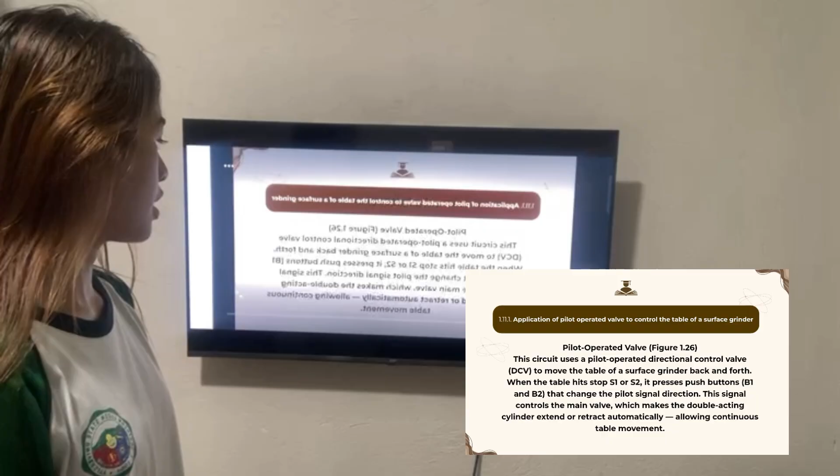Pilot-operated valve, figure 1.26. This circuit uses a pilot-operated directional control valve, or DCV, to move the table of a surface grinder back and forth. When the table hits stop S1 or S2, it presses push buttons B1 or B2 that change the pilot signal direction. This signal controls the main valve, which makes the double-acting cylinder extend or retract automatically, allowing continuous table movement.

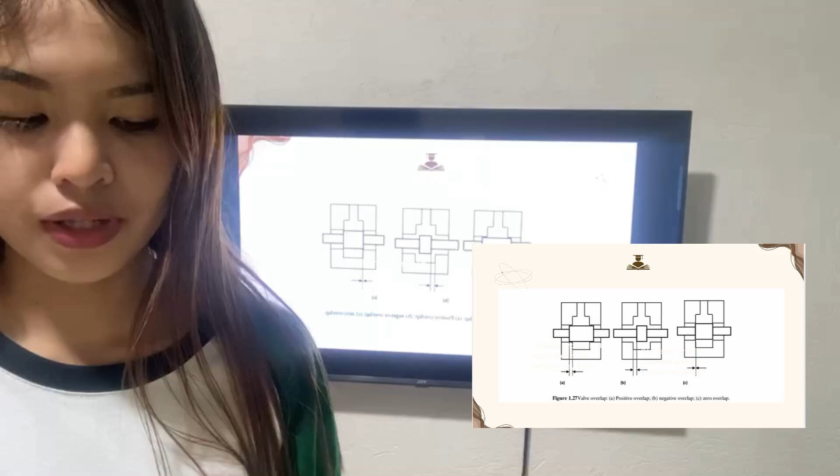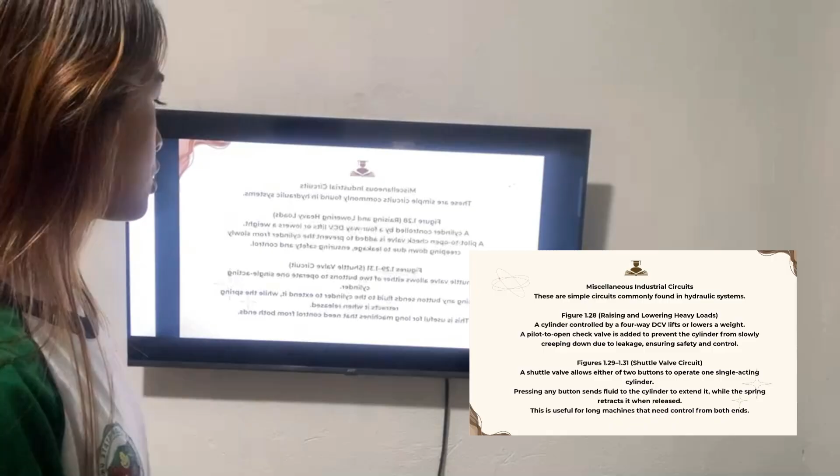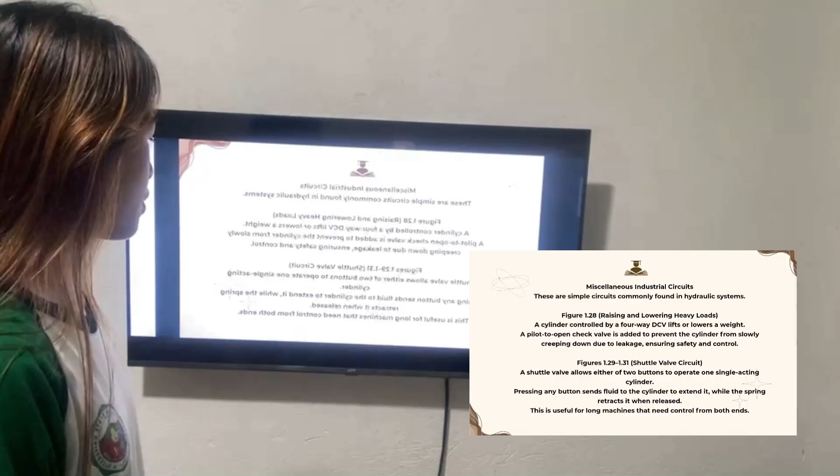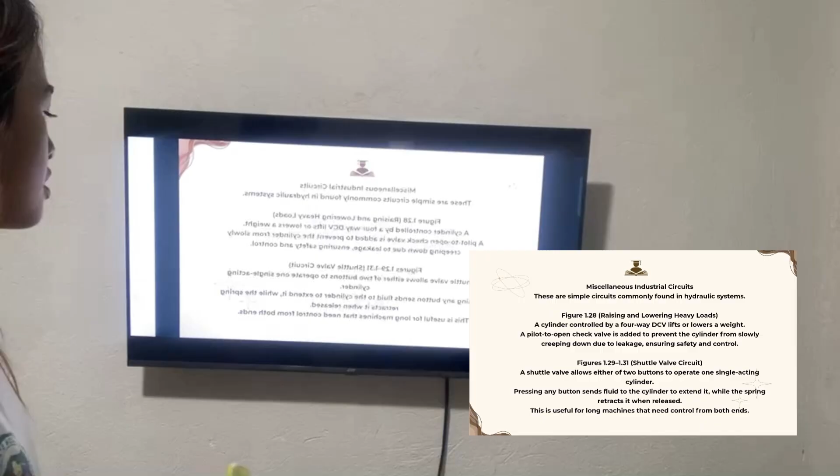There are simple circuits commonly found in hydraulic systems. Figure 1.28, raising and lowering heavy loads: a cylinder controlled by a four-way DCV lifts or lowers a weight. A pilot-to-open check valve is added to prevent the cylinder from slowly creeping down due to leakage, ensuring safety and control. Figures 1.29 to 1.31, shuttle valve circuit: a shuttle valve allows either of two buttons to operate one single-acting cylinder. Pressing any button sends fluid to the cylinder to extend it, while the spring retracts it when released. This is useful for long machines that need control from both ends.

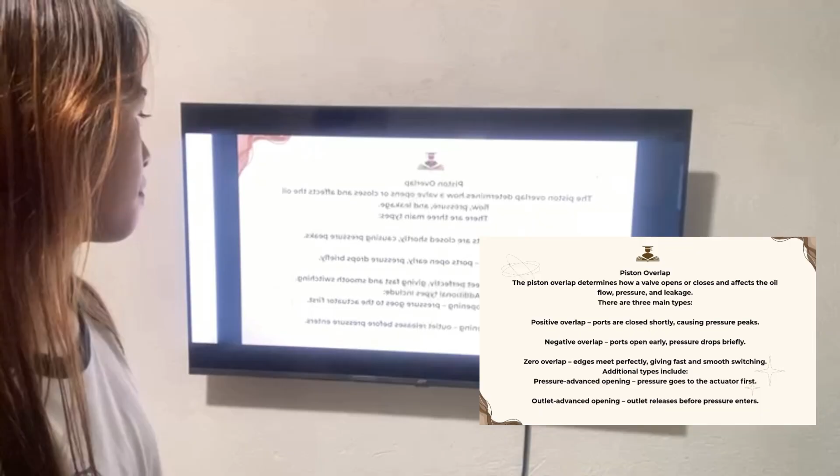Piston overlap. The piston overlap determines how a valve opens or closes and affects the oil flow, pressure, and leakage. There are three main types.

Tinutukoy nito ang pagkakaiba ng haba ng piston land, yung solid na parte ng spool, at ng port opening, yung daan ng langis nito. Ibig sabihin, ito ang distansya o pagitan ng mga parte ng valve kapag nagbubukas o nagsasara.

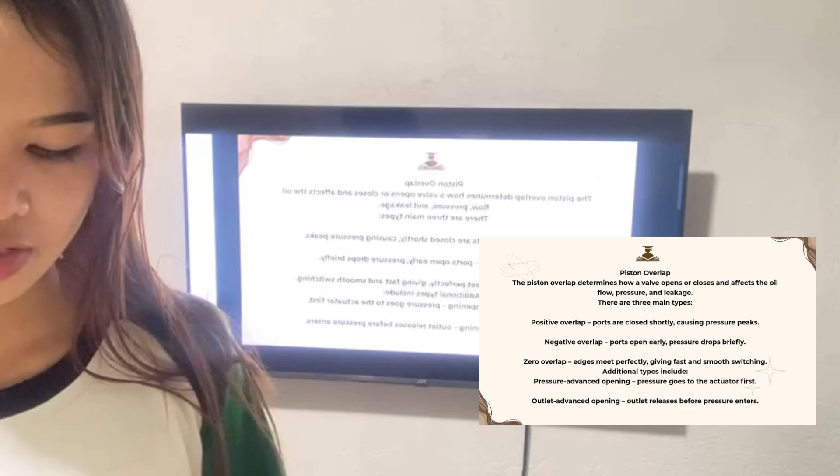Ang overlap na ito ay nakaka-epekto sa daloy ng langis at sa bilis ng paglipat ng switching.

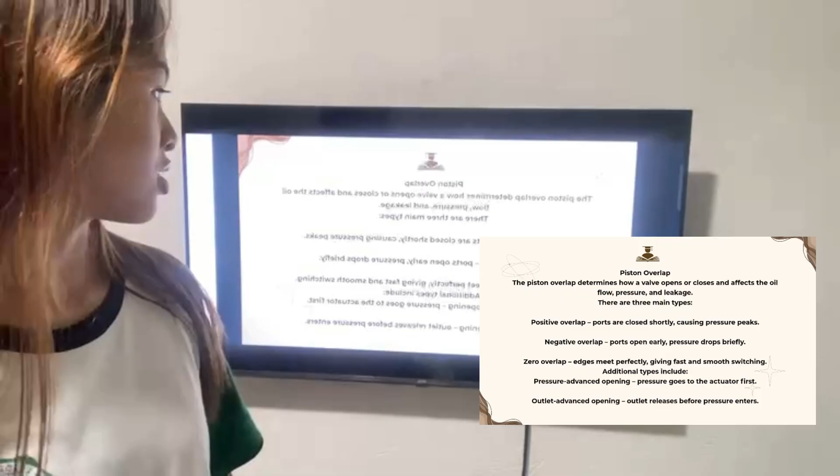At ito ang three types of piston overlap. Ang una ay positive overlap.

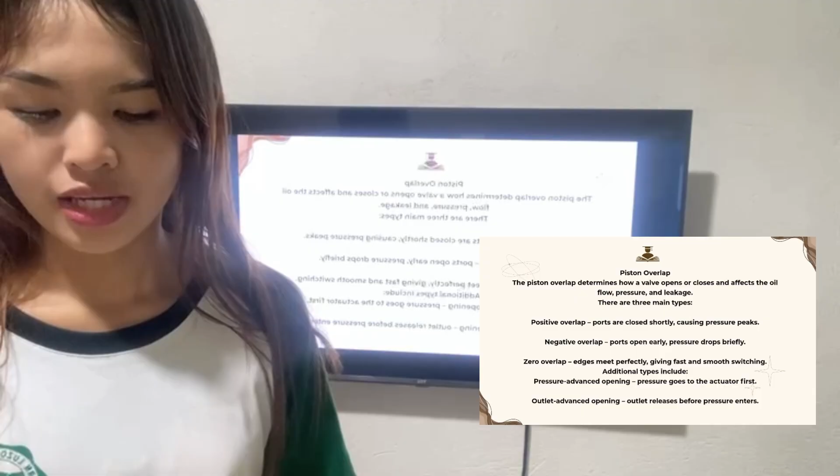Lahat ng daanan o ports ay sinasarado sandali habang lumilipat ang valve. Dahil dito, nagkakaroon ng biglaang pagtaas ng pressure.

Ang resulta nito, patigas o biglang galaw ang piston. Maganda para sa precise control pero hindi ito smooth gamitin.

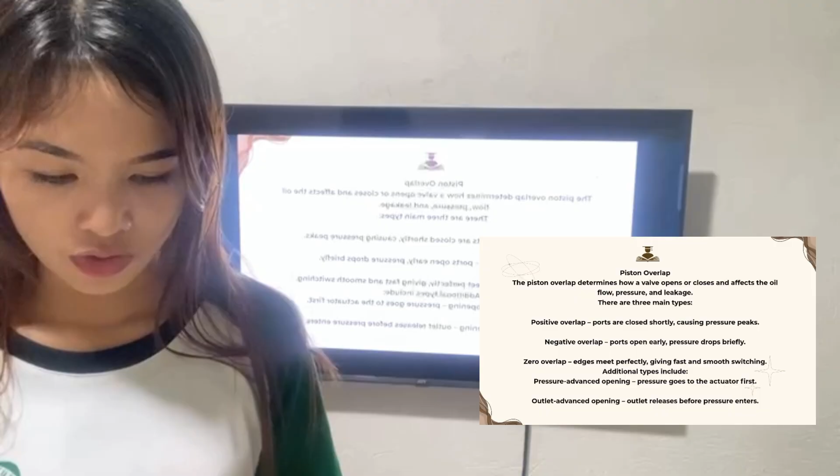Ang ikalawa naman ay negative overlap. Lahat ng daanan ay nagkakaugnay sandali habang lumilipat ito. Nagiging sanhi ng biglang pagbaba ng pressure, load drops down.

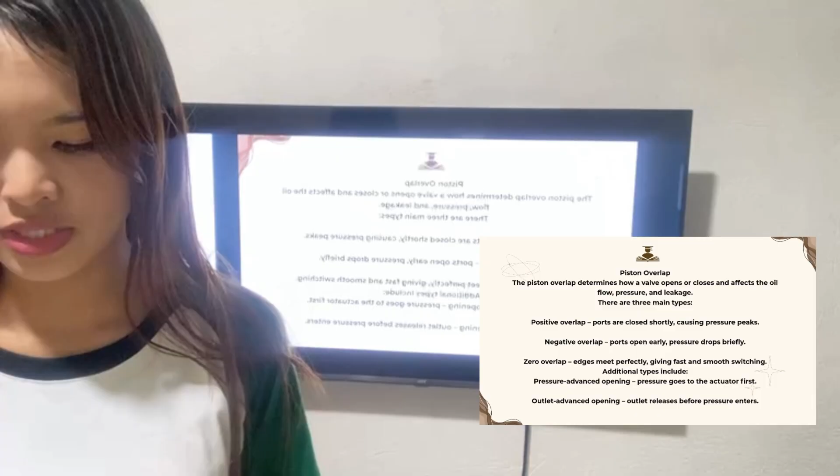Ang resulta naman nito ay mabilis, pero maaaring bumagsak ang load o mawalan ng control.

Ang pangatlo, zero overlap. Saktong nagtatagpo ang edges ng piston at port. Wala masyadong itong delay o leakage. Mabilis naman ito at pantay ang switching, kaya ito ang madalas gamitin sa high-speed system.

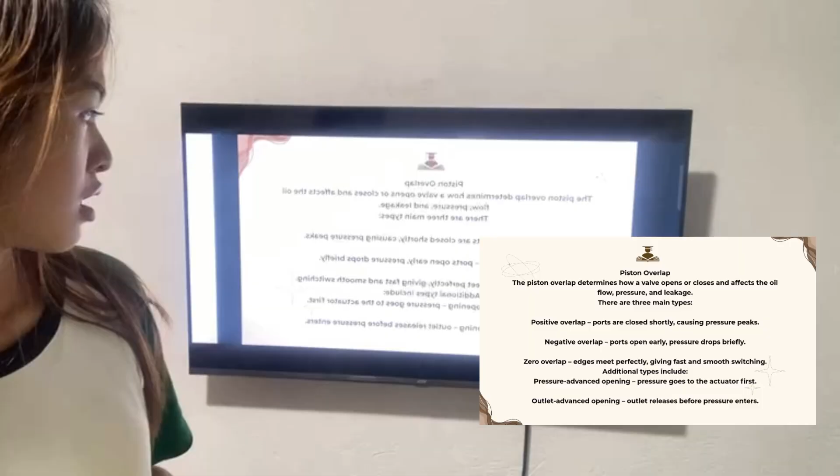At ang kasunod naman ay ang pressure-advanced opening.

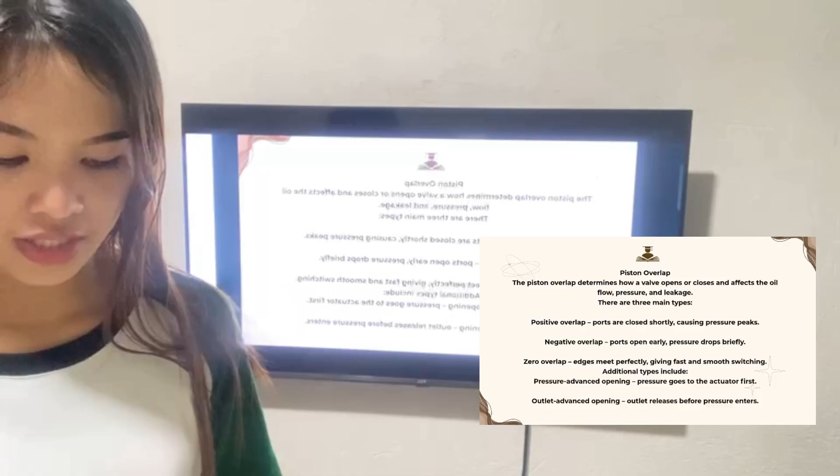Una munang nakakonekta ang pump sa actuator bago ito bumalik sa reservoir at nagbibigay ito agad ng pressure sa system kaya mabilis ito mag-response.

Ang kasunod ay ang outlet-advanced opening. Unang nagdi-disconnect o mabubuksan ang outlet papunta sa reservoir bago pumasok ang pressure mula sa pump.

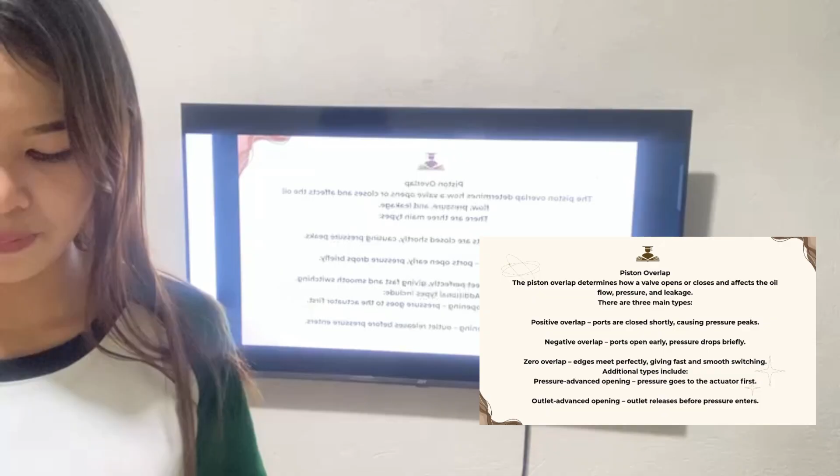Ang resulta ay maayos at kontroladong paglabas ng pressure, iwas sa biglaang paggalaw o pressure spike.

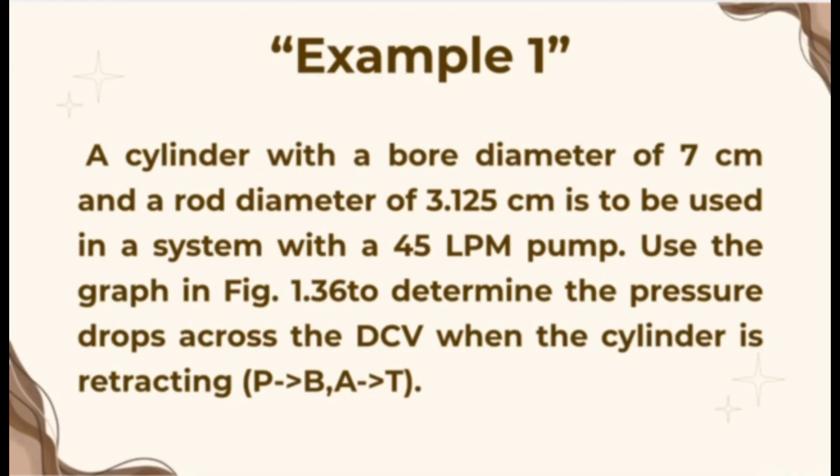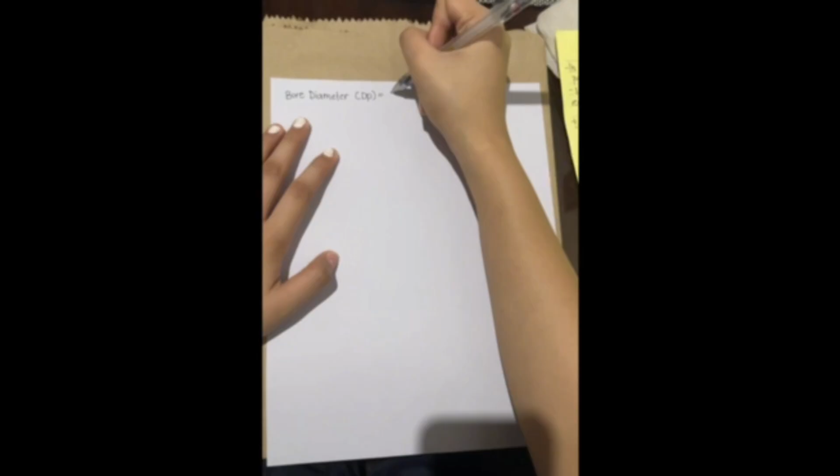First thing to do is let's find the given data. To find the given data, we're gonna find the bore diameter or the DP, the rod diameter or the DR, and the pump flow or the QP. According to example 1, the bore diameter or DP is equal to 7 cm, the rod diameter or DR is equal to 3.125 cm, and the pump flow or QP is equal to 45 LPM. And this is the clear given data.

To study the solution, first is alamin kung anong direction ng flow kapag nag-retract ang cylinder. Ang titingnan natin is yung P to B and A to T. Una, ang pump flow ay pupunta sa rod end, P to B. Ang fluid sa kabila ay lalabas bilang return flow, A to T.

After that, babasahin ang pressure drop para sa P to B. Kapag ang flow ay equals to 45 LPM, ang pressure drop mula sa P to B ay mga 3.2 bar. Then kailangang malaman ang return flow rate ng A to T. Ang area sa rodside ay mas maliit kaysa sa area sa boreside, kaya mas mabilis ang paglabas ng langis sa blind end, ibig sabihin mas malaki ang return flow.

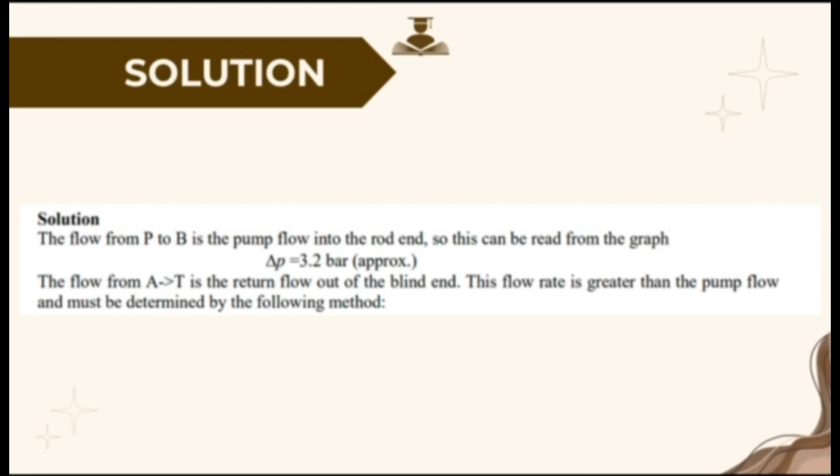So we must be determined by the following method. To solve, we're gonna calculate the piston area, rod area, and return flow. And here are the formula for piston area, and let me teach you how to solve it. AP is equal to pi over 4 times dP squared.

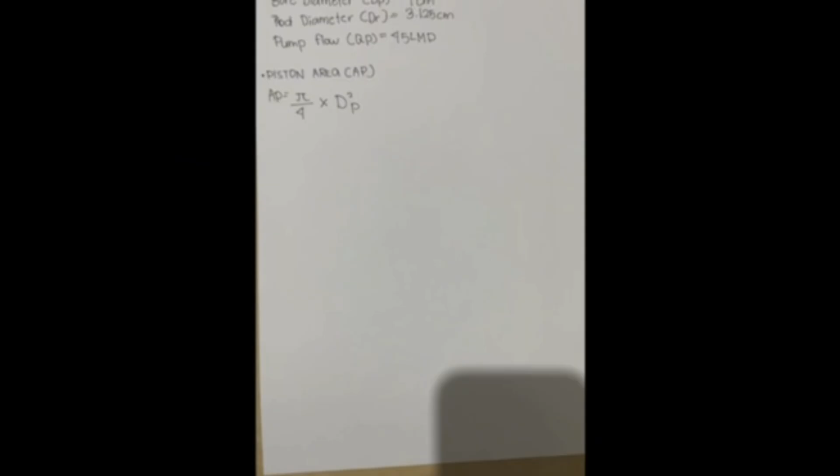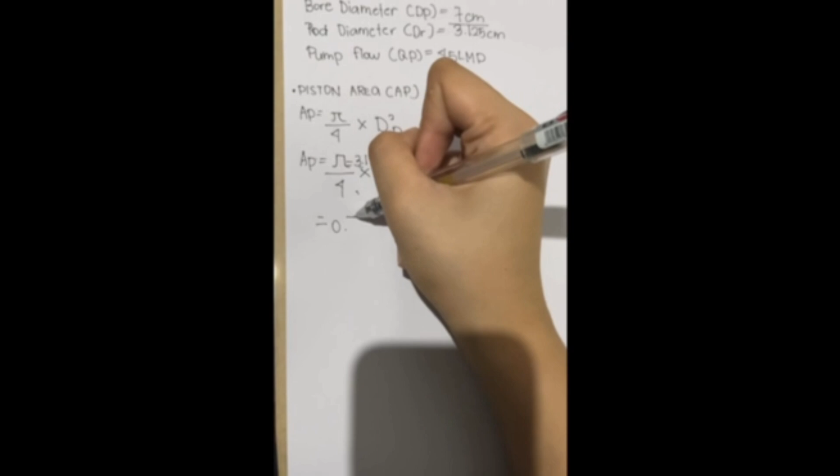To easily understand, we're gonna write again: AP is equal to pi over 4, times we're gonna substitute the dP, which is equal to 7 cm, and we're gonna write 7 cm squared. Next is we're gonna find the value of pi, which is 3.14, and we're gonna divide it by 4, and it's equal to 0.785 times 7 cm squared. Lastly, we're gonna multiply this, and the answer is 38.5 cm squared.

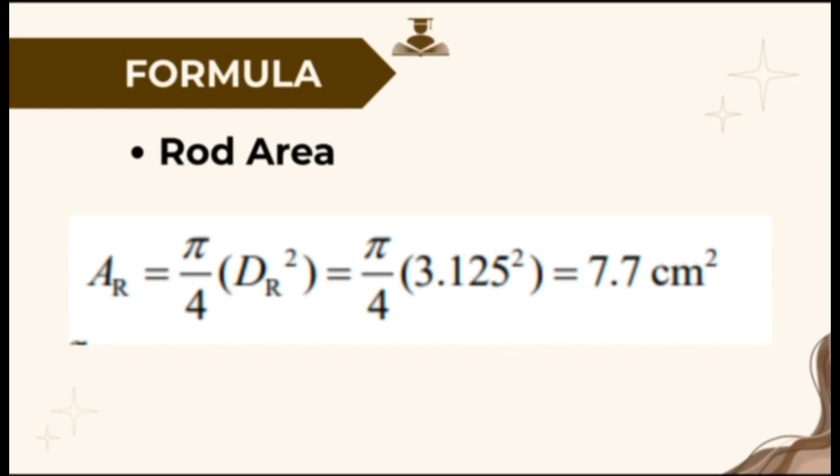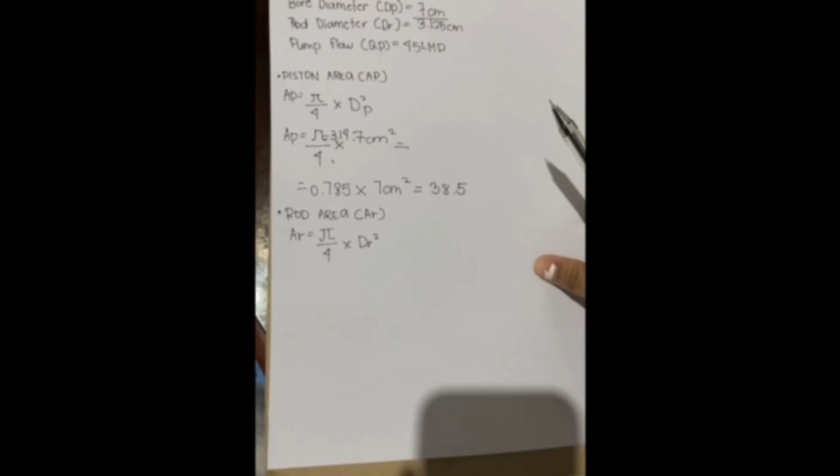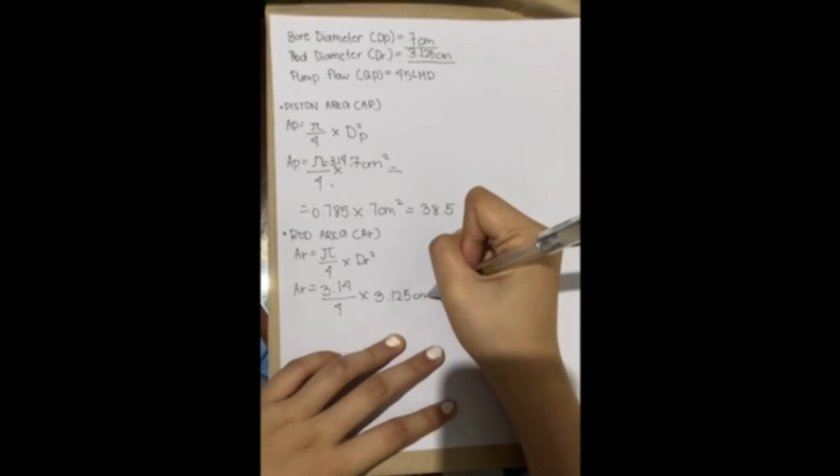And next is the rod area, let's compute this again. Rod area or AR, the formula is AR is equal to pi over 4 times dr squared. Next is we're gonna substitute: AR equals pi, which is 3.14, over 4, times the dr or the rod diameter, which is equal to 3.125 cm, squared. To compute again, 3.14 divided by 4 is equal to 0.785, then times 3.125 cm squared is equal to 7.7 cm squared.

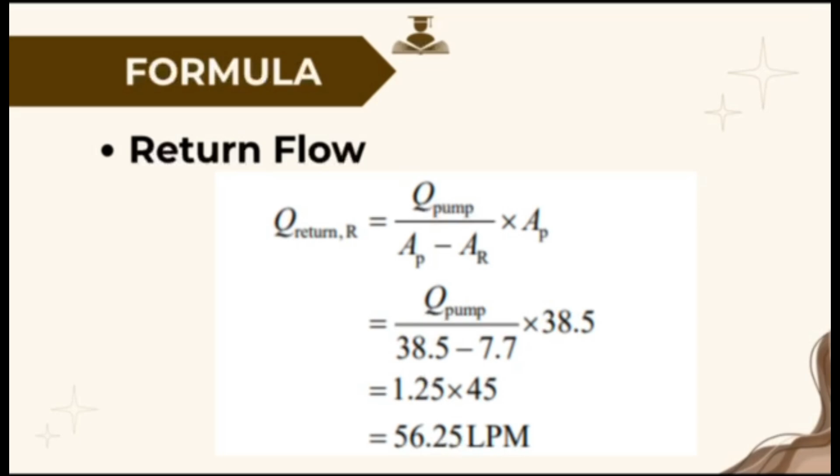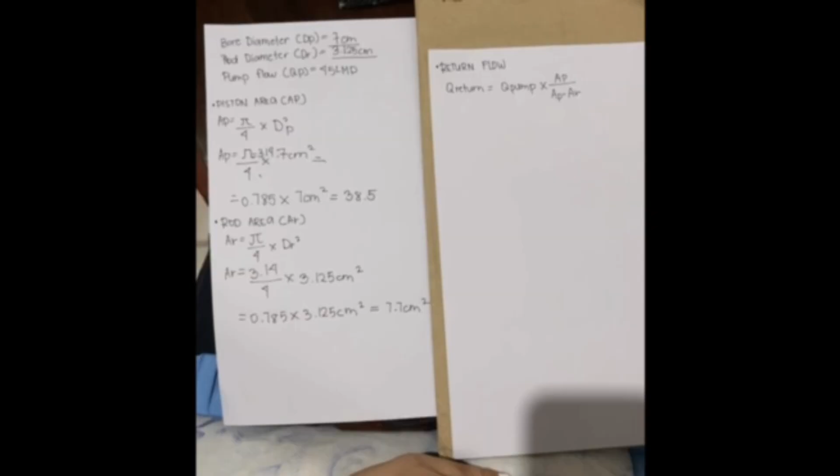And last is the return flow. Return flow formula: Q return is equal to Q pump times AP over AP minus AR. The first thing to do is to substitute again. So Q return is equal to pump flow or QP, which is equivalent to 45 LPM.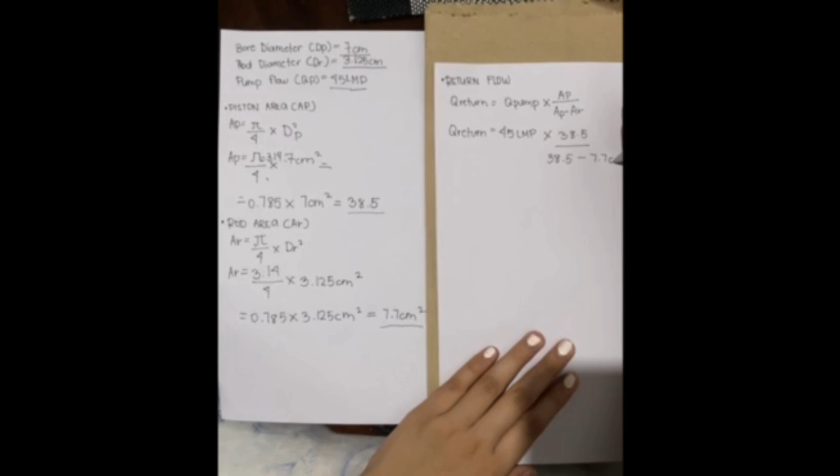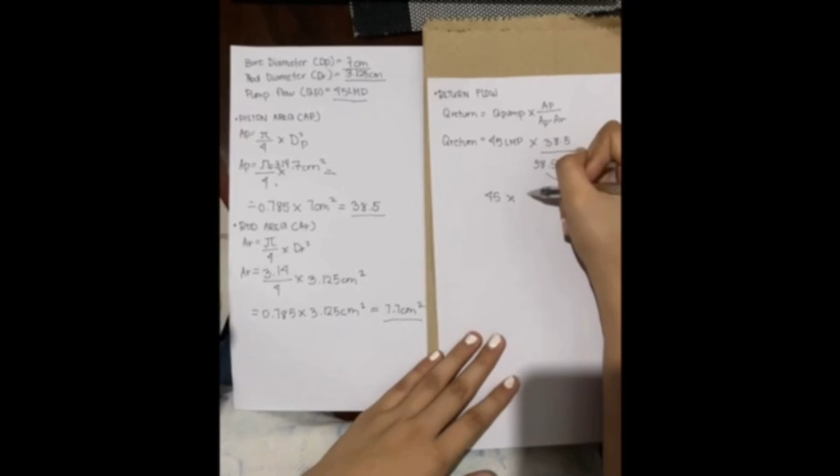Times AP, or the piston area, which is 38.5 over AP again, 38.5 minus AR or the rod area, which is equal to 7.7. First thing to do is to subtract 38.5 minus 7.7. To easily understand, we're gonna copy again the 45 times 38.5, and the answer for the subtraction is 30.8.

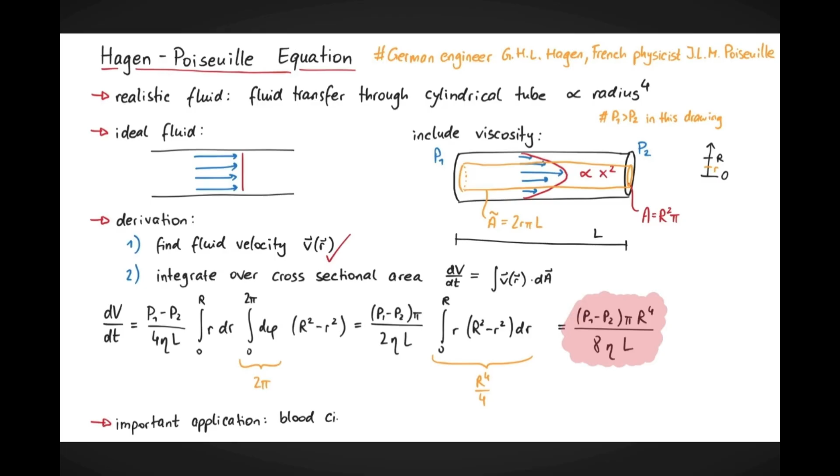This has important consequences, for instance, for blood circulation in the human body. By doubling or halving the radius of an artery, the human body can control how much blood flows through it by a factor of 16.

As a final note, if we consider just an infinitesimal portion of the tube, we can replace the pressure difference divided by the tube length by a pressure gradient.

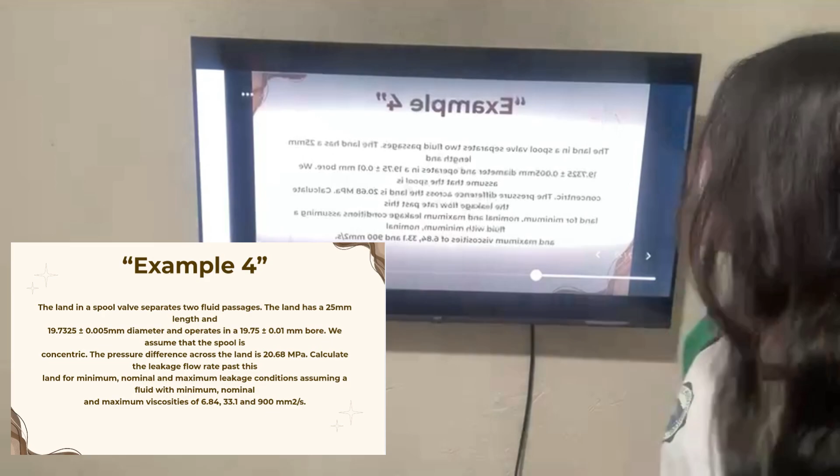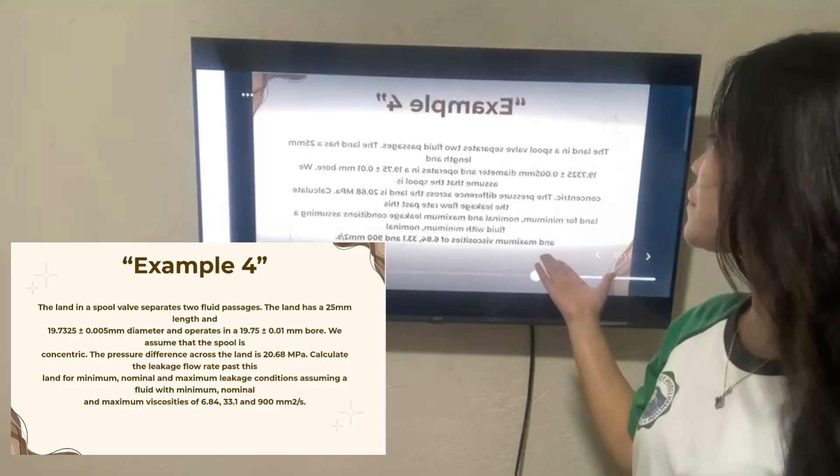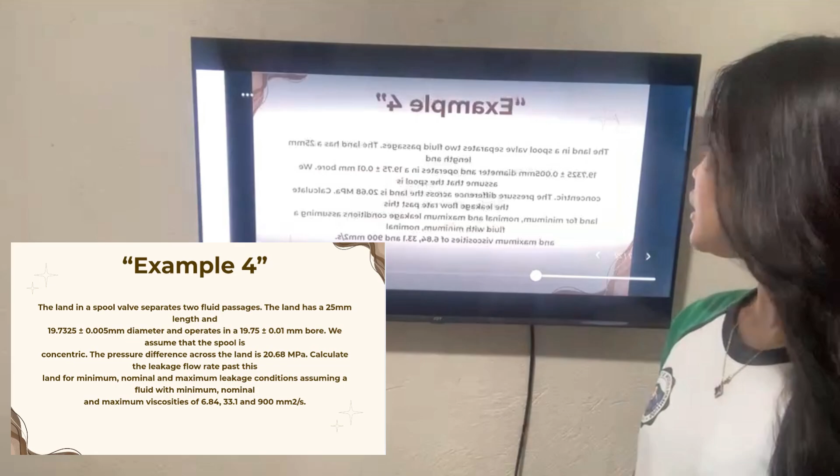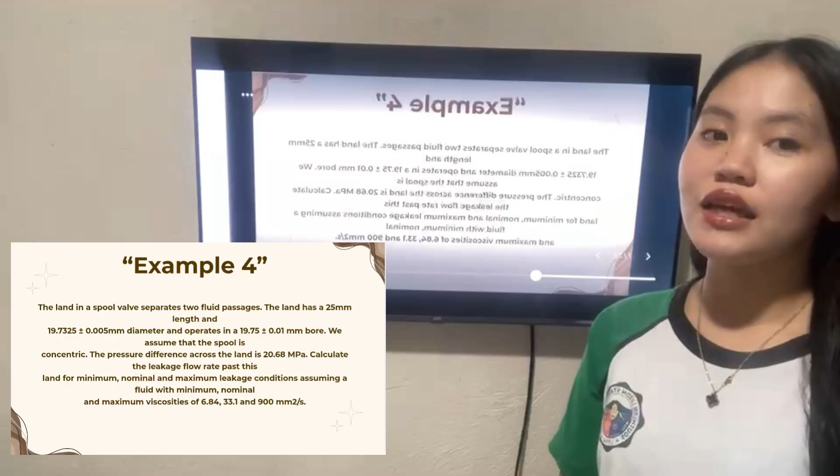Let's begin with example number 4. The land in a spool valve separates two fluid passages. The land has a 25 mm length and 19.7325 plus minus 0.005 mm diameter, and operates in a 19.75 plus minus 0.01 mm bore. We assume that the spool is concentric. The pressure difference across the land is 20.68 MPa. Calculate the leakage flow rate past this land for minimum, nominal, and maximum leakage conditions, assuming a fluid with minimum, nominal, and maximum viscosities of 6.84, 33.1, and 900 mm squared per second.

Let's start with the given. The land length is 25 mm, and spool diameter, symbol ds, equals 19.7325 plus minus 0.005 mm. Bore diameter, symbol db, equals 19.75 plus minus 0.01 mm. Pressure difference, P, equals 20.68 MPa. Kinematic viscosity minimum is 6.84, viscosity nominal equals 33.1, and viscosity maximum equals 900. So the given will be required for minimum clearance, nominal clearance, and maximum clearance.

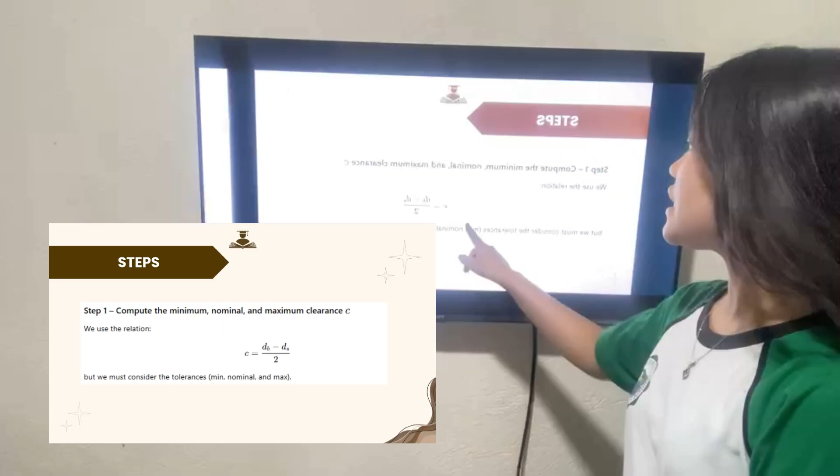For the steps, we will start with step 1, which is to compute the minimum, nominal, and maximum clearance, letter C. We use the formula C equals db minus ds, divided by 2. But we must consider the tolerance for min, nominal, and max, and this is how you do it.

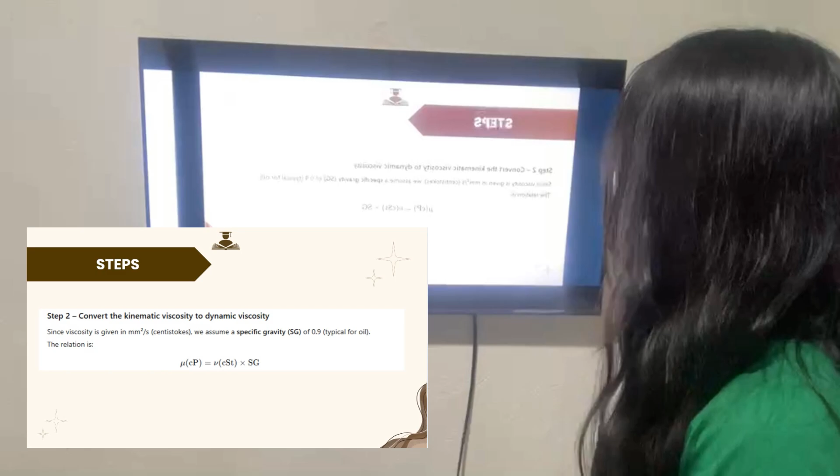Now that you know step 1, we will continue to step 2, which is convert the kinematic viscosity to dynamic viscosity. Since viscosity is given in mm squared per second, centistokes, we assume a specific gravity, symbol Sg, of 0.9, typical for oil. The relation is this formula. Now that you know the formula, we must go on how to convert the kinematic viscosity to dynamic viscosity, and this is how you will do it.

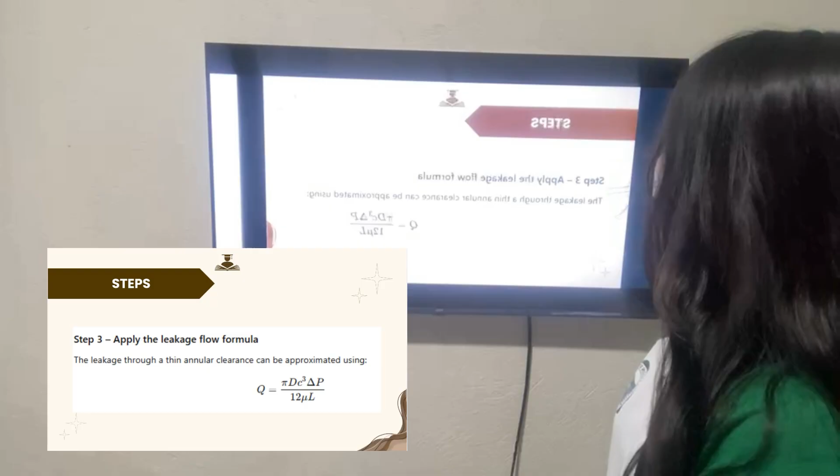After step 2, we must proceed to step 3, which is to apply the leakage flow formula. The leakage through a thin annular clearance can be approximated using this formula.

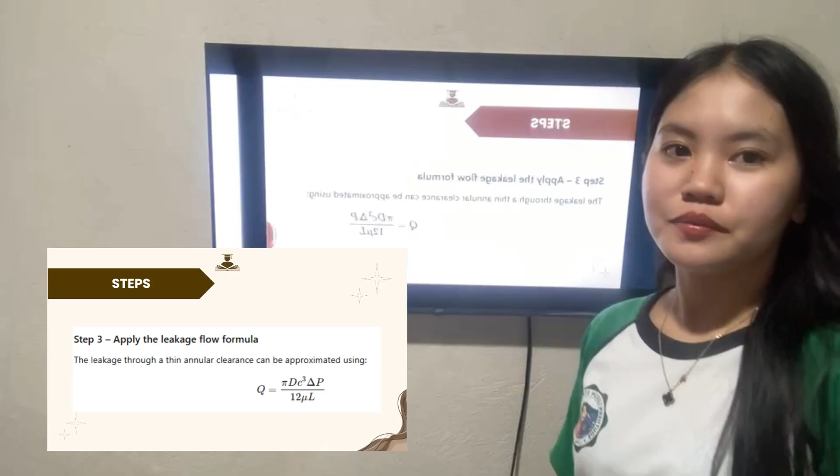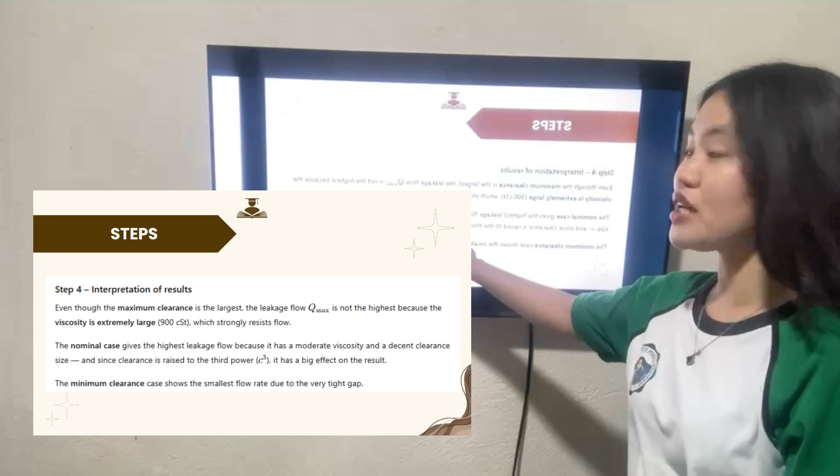After the solution, we must interpret the result. Even though the maximum clearance is the largest, the leakage flow Q max is not the highest because the viscosity is extremely large, 900 cSt, which strongly resists flow. Then the nominal case gives the highest leakage flow because it has a moderate viscosity and a decent clearance size. And since clearance is raised to the third power, C with the exponent of 3, it has a big effect on the results. The minimum clearance case shows the smallest flow rate due to the very tight gap.

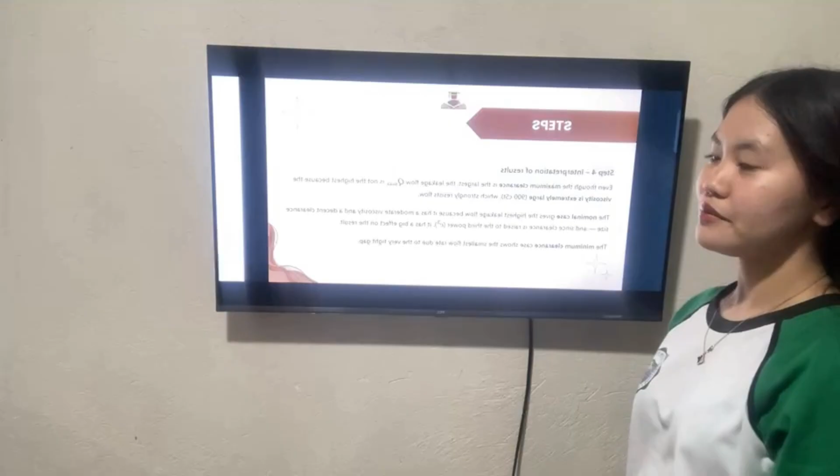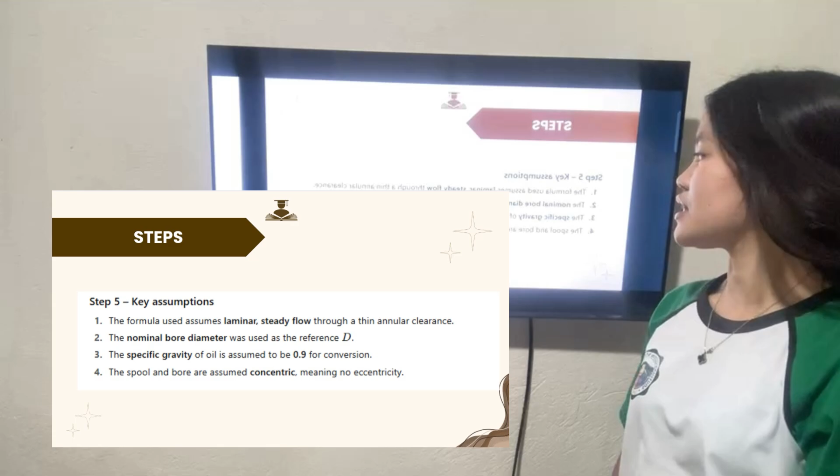Step 5 is the key assumptions. The formula used assumes laminar, steady flow through a thin annular clearance. The nominal bore diameter was used as the reference D. The specific gravity of oil is assumed to be 0.9 for conversion. The spool and bore are assumed concentric, meaning no eccentricity.

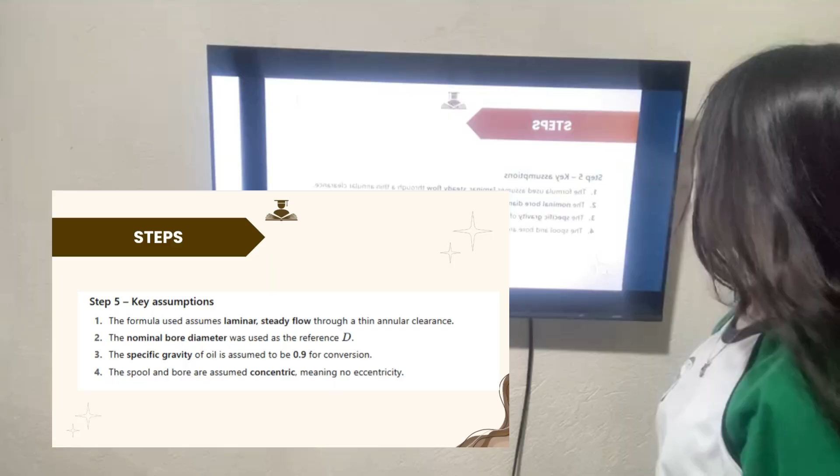In step 1, we must find the minimum, nominal, and maximum clearance denoted as C. The formula is C equals bore diameter minus spool diameter, divided by 2. Now let's substitute the values.

For minimum clearance, we use the smallest bore and the largest spool. Bore minimum will be equal to 19.75 minus 0.01, which will be equal to 19.74 millimeters.

Then the spool maximum will be equal to 19.7325 plus 0.005, equal to 19.7375 millimeter.

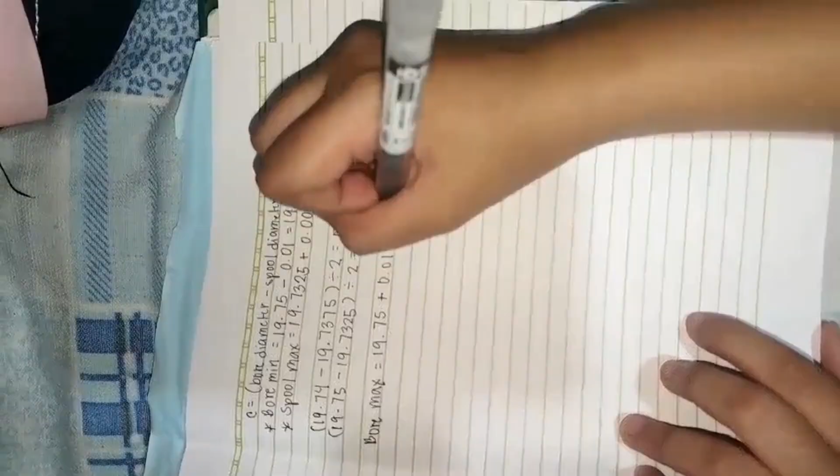Then after the nominal clearance, we will proceed with the maximum clearance. We use the largest bore and the smallest spool, which is bore maximum equal to 19.75 plus 0.01, equal to 19.76. And the spool minimum is equal to 19.7325 minus 0.005, equal to 19.7275.

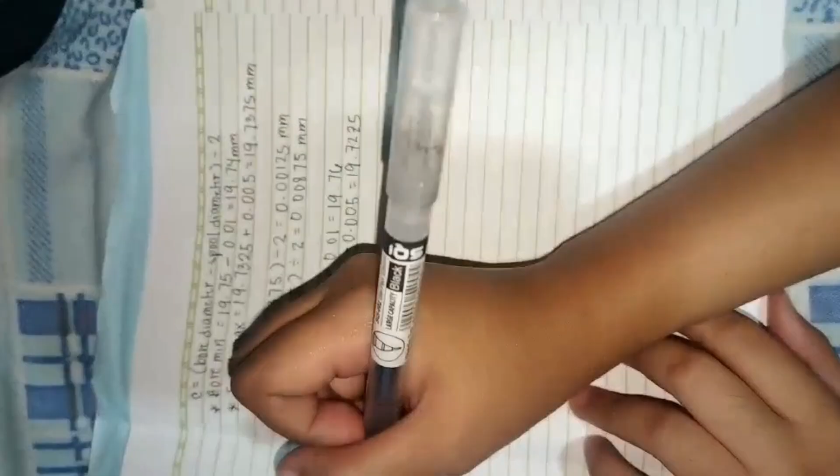Then 19.76 minus 19.7275 will be divided by 2, will be equal to 0.01625 millimeter. And now we must compute each.

For minimum, it is 6.84 times 0.9 times 0.001, equal to 0.006156 PAS.

For nominal, it is equal to 33.1 times, again, our specific gravity which is 0.9, times 0.001, equal to 0.02979 PAS.

After that, for our maximum, it will be 900 times 0.9 times 0.001, equal to 0.81 PAS.

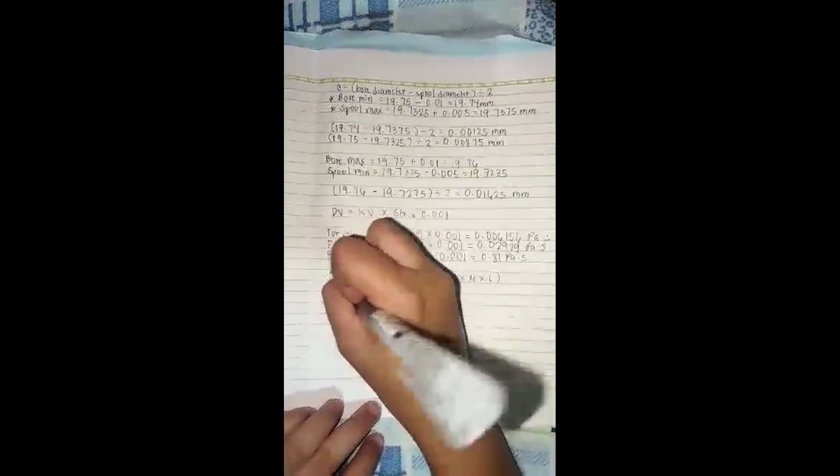Divided by 12 times L, where D is equal to 19.75 mm or 0.01975 meters, and L is equal to 25 mm or 0.025 meter, and P is equal to 20.68 megapascals, or 20.68 times 10 to the exponent of 6 pascals.

Now let's compute for each case. For minimum clearance, we must substitute the values first. So our C is equal to 1.25 times 10 to the exponent of negative 6 meter, equal to, MU equal to 0.006156 PAS.

After solving, our Q min will be equal to 1.36 times 10 to the exponent of negative 9 cubic meter per second.

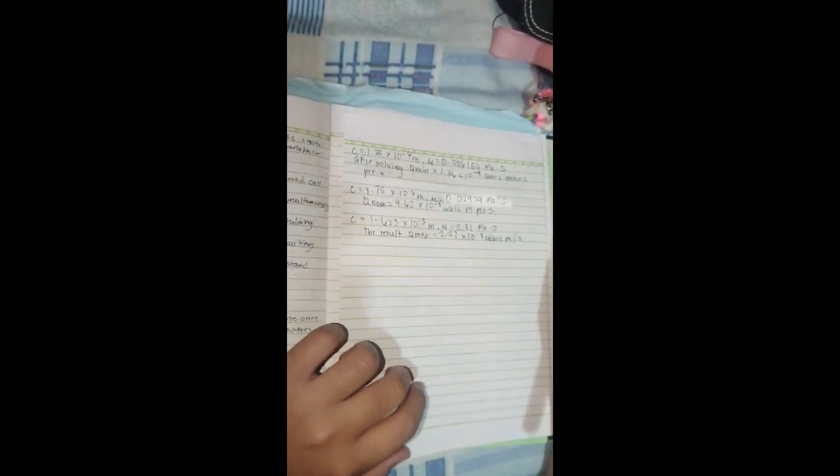So after that, we will proceed with the interpretation. These two values came from the bore maximum and the spool minimum.

Now that we are done with step 1, we will continue to step 2, which is converting viscosity. We convert the kinematic viscosity into dynamic viscosity in Pascal seconds. We assume that specific gravity is 0.9. The formula is dynamic viscosity equal to kinematic viscosity times Sg, which is our specific gravity, times 0.001.

Then 19.76 minus 19.7275 will be divided by 2, will be equal to 0.01625 millimeter. And this value came from...

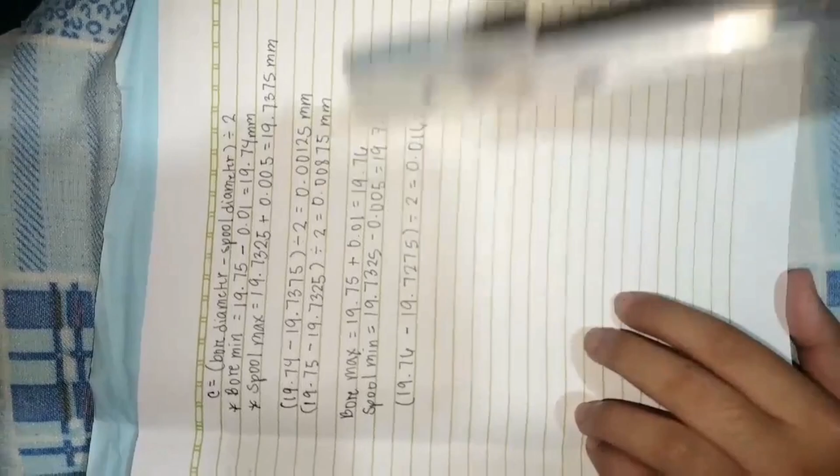And that's how I computed the leakage flow rate and the minimum, nominal, and maximum clearance in the spool valve. Thank you.